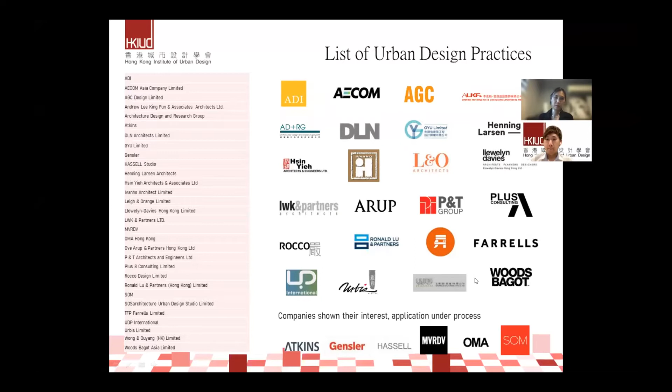For tonight's webinar, we are very pleased to share our very first physical activity, conducted on June 12th, Saturday, with great support from the Harbourfront Office, including our founding member Mr. Vincent, JP, Chairman of the Harbourfront Commission, and also the Principal Assistant Secretary of the Harbourfront Office, Rosaline Zhang. They joined our tour and guided us, showing the great effort in transforming the Hong Kong waterfront in recent years.

This slide shows the activity we had, the two-hour journey that they brought us through. Now we will show a quick video highlighting the tour, guided and hosted by the Harbourfront Office.

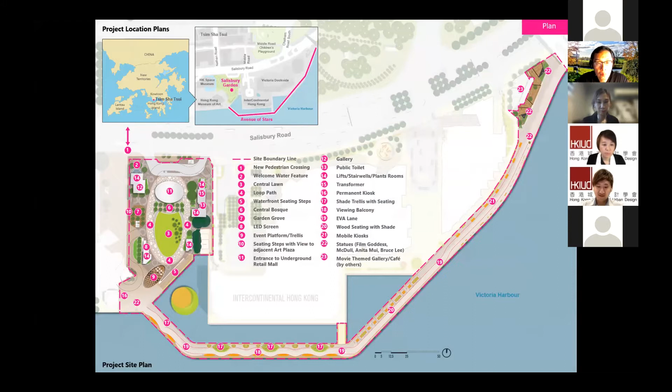Public consultation was undertaken early on with the local district council and with a long list of stakeholders, primarily the Hong Kong film industry. Then in 2015, a Hong Kong-wide open public consultation was held with both local residents and tourists participating.

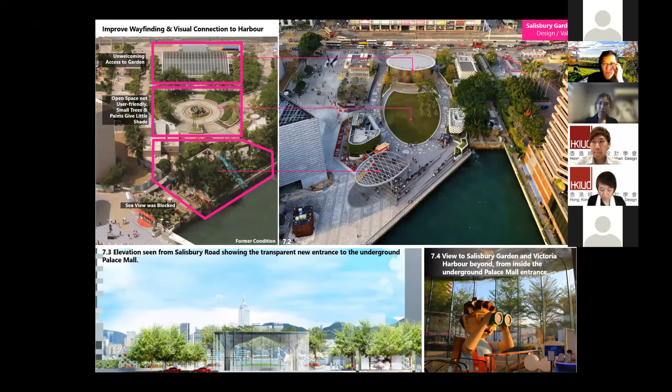I'll talk first about Salisbury Garden. There were numerous technical constraints in our design, principally the fact that the garden is located above an existing underground shopping mall, which meant firstly that structural loadings were largely predetermined, and secondly that we had to accommodate a number of pop-up houses serving various purposes related to the mall, such as E&M rooms, lifts, and fire exits.

Main problems with the existing condition of the garden, as shown in the image on the left, were the total lack of visual connection with the harbour and a very inward-looking design layout that ignored the great waterfront location and contained palms and small trees that offered very little shade to the users.

So what we did was basically remove all the visual blockage and improve the overall legibility of the design layout, as shown on the image on the right. We pushed all the pop-up buildings to the east and west edges of the garden and opened up the centre to provide a multi-purpose lawn offering great views to the harbour.

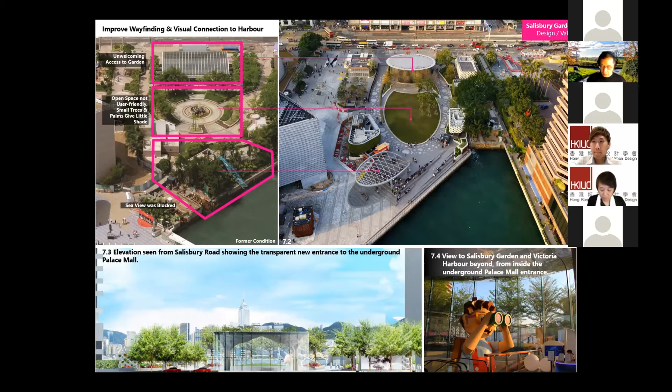The loop path on either side of the lawn provides a direct route to the harbour from Salisbury Road and draws people forward to the Harbourfront. The central event lawn on either side is the key centerpiece of the whole design.

It is gently domed and provides a multi-purpose space for lounging, sunbathing, casual play, picnicking, and photo taking. The lawn is a highly flexible space that people have been using for a variety of purposes during day and night. It is actually a new destination location along the Harbourfront, or at least it was, but more about that later.

Another key aspect of the design is the treatment of the houses around the garden perimeter. These are clad with two complementary green wall designs. Firstly, the so-called garden walls, inspired by the orchid flower, comprise elegantly shaped precast GRC modules that provide a setting for lush planting. Secondly, the green fern walls provide a simple yet attractive green texture that visually contrasts with the garden walls.

At the north end of the garden, a welcome water feature is provided to flag up the existence of the garden to passing pedestrians on Salisbury Road.

Planting performs several very important functional and aesthetic roles in Salisbury Garden. The trees play a key role in shaping and defining the different spaces within the garden, framing views towards the harbour and providing the shade so vital to the comfort of users in the hot summer months.

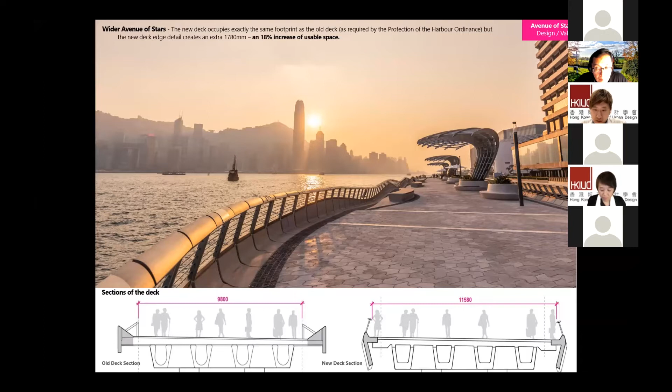One other key thing that we had to do was to comply with the protection of the harbour ordinance. This meant that the new deck could not extend 1 millimetre outside the footprint of the old deck. Yet by clever design of the edge balustrade, we were able to increase the usable space from just under 10 metres to over 11.5 metres, an increase of about 18% in usable space.

The other major change to the deck was the introduction of undulations that create opportunities for step seating and viewing balconies, which helps to optimize views to the harbour across the entire width of the promenade. The balustrade detail also helps create better visibility of the water when compared with the old design, enabling people to feel closer to the water.

The sculptural edges of the parapet comprise overlapping fish scale pieces that conceal LED lights that provide a dramatic ribbon of light when viewed from passing cruise boats and even from the other side of the harbour.

Another significant feature was the relocation of the handprints of the film stars from the ground, as in the old design, to the balustrade railing. This is a far more hygienic arrangement and also means that people checking out the handprints are located to the side of the main central pedestrian thoroughfare.

To enhance the user experience, QR codes and the handprint plaques link to websites with information on the stars. Also, the 4 existing statues of Anita Mui, Bruce Lee, McDull, and the Goddess of Film are also given beautiful new settings that provide enhanced photo opportunities.

Seating provision is dramatically increased by a factor of almost 4, and in a variety of different shapes and sizes, which is important because it gives the public choice depending on their individual preferences and whether they're in a large group, just a couple, or a singleton.

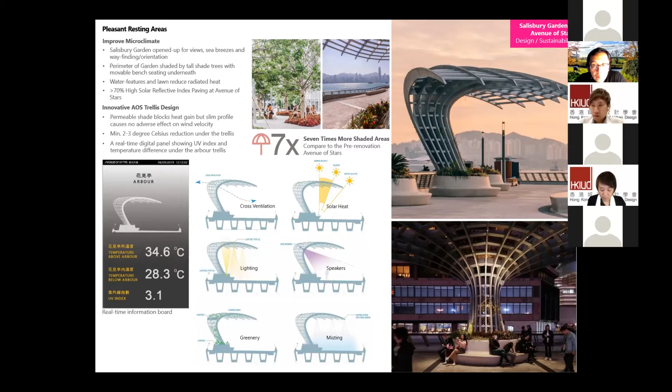And the 4 large trellises are really an elegant and quite a smart design, intended to maximize shade whilst minimizing visual obstruction of the harbour to the neighbouring Intercontinental Hotel. They also contain downlighting, speakers, and misting devices to assist in the cooling effect.

Although the loading restrictions prevented the planting of trees in the Avenue of Stars, the trellises actually perform a similar shading function, but in a more streamlined manner. The shrubs, ground covers, and climber planting was chosen carefully to be able to tolerate the harsh seafront environment, and it is thriving.

A large number of sustainable design elements were incorporated into the design of both Salisbury Garden and the Avenue of Stars from the outset, and Avenue of Stars is the first project in China to be awarded the SITES gold certification.

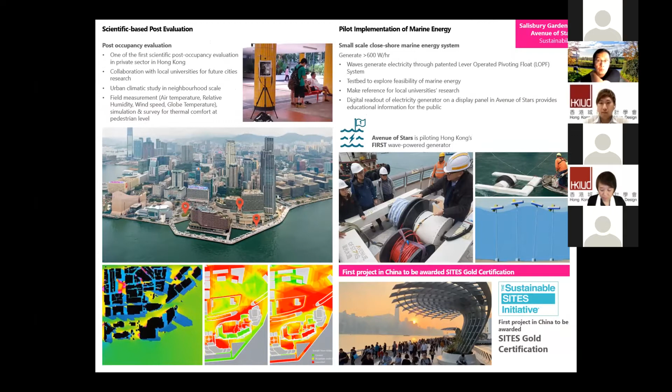So I'd now like to update you a little bit on some recent changes and additions, and maybe later we can discuss whether we think these are good or not so good.

They erected those to stop people sitting in large groups on the balcony seats. Anyway, whatever the reason, I think the planting looks good, adds to the overall greening effect, and does not block views or access to the balustrade. So overall, I think that's okay.

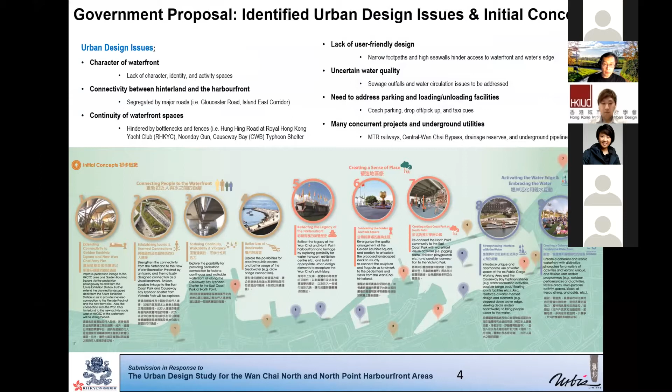So if we go to the government initiatives, there's absolutely nothing wrong with the broad identification of issues that we went through. Certainly there is a lack of character in the waterfront, and you'll see this from my later slides. I don't have any problems with some of the things suggested within the framework suggested by the government, but at the same time, we built upon these just to go that little bit further and really to get into some of the forgotten areas.

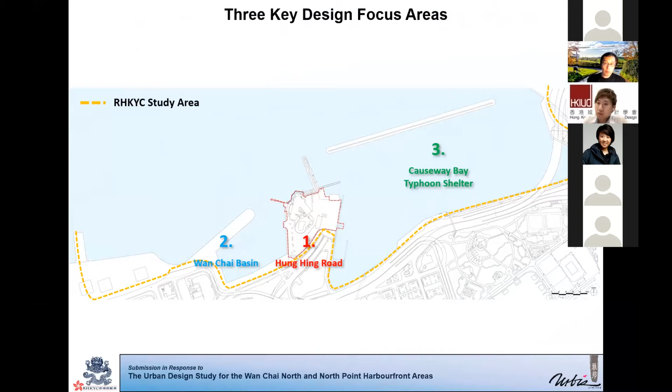So we divided the area into basically three key design focus areas. You can see that on this screen.

So starting with the Hung Hing Road. Now, you might not think this is particularly important, but in fact it is. It's not only the access to the Hong Kong Yacht Club, but it's also the access to the new police officers club, and of course the waterfront itself.

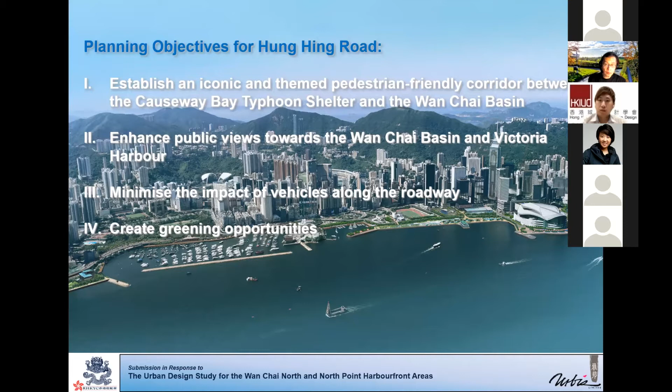So we looked at various things. There's four major elements here. Obviously, greening, minimize the impact of vehicles, which is important and not unachievable. As Sandy's just been mentioning, optimizing views, very important. And then trying to optimize accessibility by pedestrians.

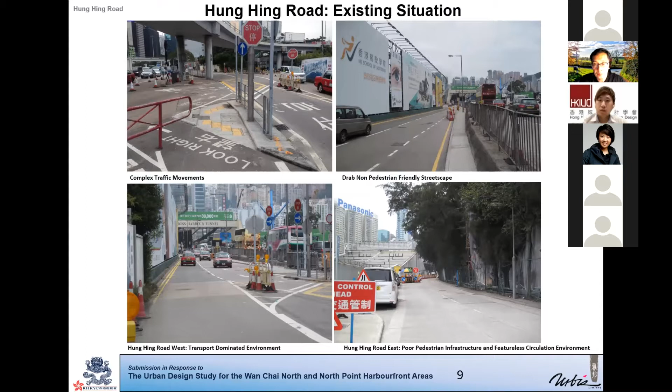Now, if you look at it now, at the present time - okay, so these are slightly old photographs, but a lot of this is what it's like today. It's a real mess, and it has no character whatsoever. And yet this is actually a fundamental part of Hong Kong adjacent to the waterfront.

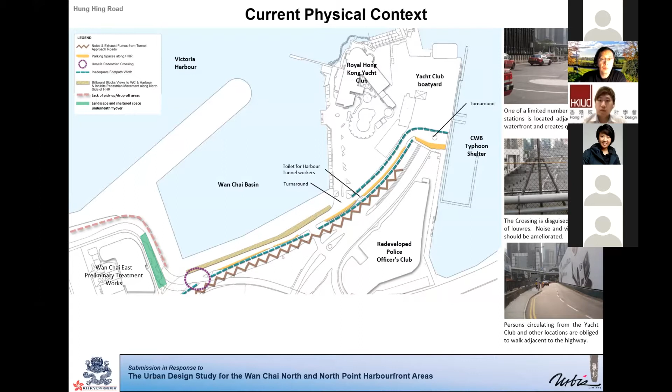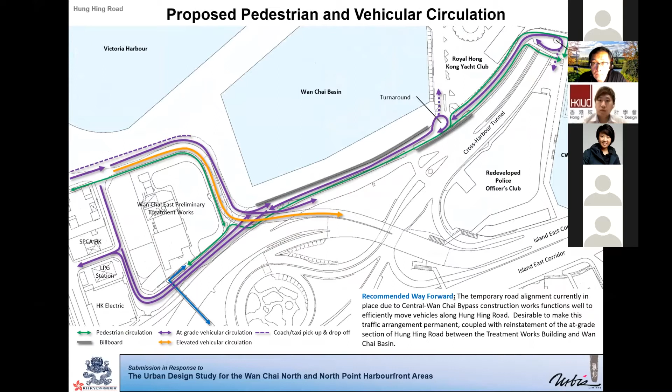So pedestrian vehicle circulation is shown in this drawing. I think that's fairly explanatory. And what we've done is proposed amendments to this. We think that the temporary road arrangement was actually quite good because it actually circulated vehicles in a very sensible way, so we thought that that could go ahead.

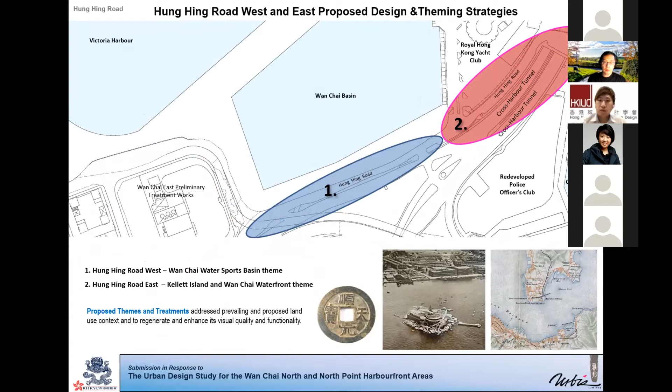So one of the main things here is an optimal intervention we suggested was to take away the advertising billboards here and to completely revitalize the area.

To assist in promoting a better waterfront for people, we suggested the construction of a noise barrier. Now, I'm not a great fan of noise barriers, but in situations like this, a subtly introduced noise barrier, very much like you've got at Quarry Bay, can be very effective and not very visually intrusive. And certainly it wouldn't have birds flying across it in sort of stencil-like graphics.

Removal of the billboard is important. What you get there by the removal of that is a connection for the people walking along Hung Hing Road, but also visual connections for people in the traffic jam going into the Cross Harbour Tunnel. And beyond that, people living in Causeway Bay.

We propose reprovisioning the footpath into the waterfront overall, where the billboards were, and then the introduction of quality paving and planting areas.

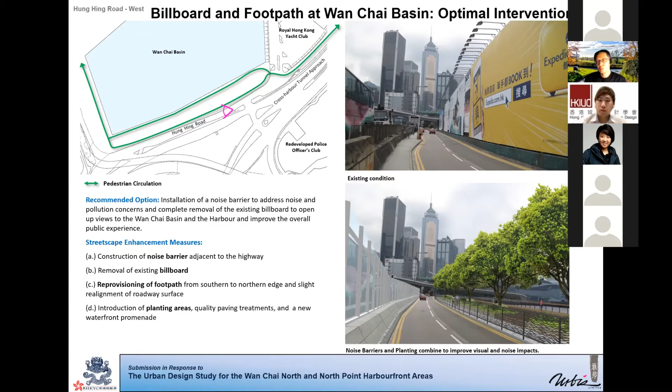As for the yacht club itself, clearly members and taxis and so on had to get into the yacht club, but it was important to allow people circulating along Hung Hing Road from the waterfront to be able to get along the waterfront and circulate right down to the typhoon shelter in Causeway Bay, as well as the police officers club. So you had a couple of things here.

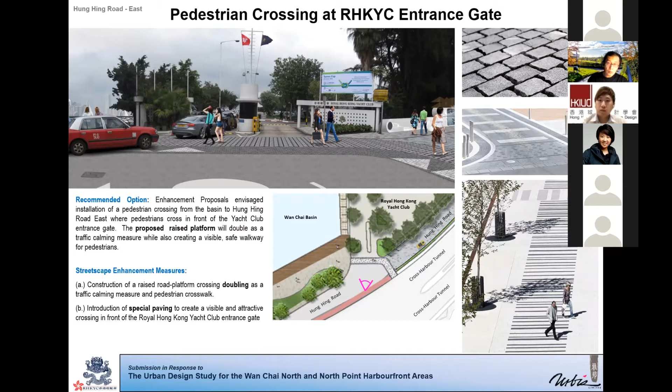You had a road platform crossing that you can see some of the featured designs on the right-hand side of this slide and the sort of thematic approaches that you may wish to incorporate. So it was a special paving that would be both attractive, and it would also have the function of slowing down traffic.

And then for the eastern side of Hung Hing Road, it was in very poor condition. You've got parking for no real reason at all, just that it's there. So we proposed as an initial step to remove the parking areas, to re-provision the footpath to the northern edge of the site, to create a dedicated path here, and to repave the vehicle circulation area in an interesting way so that it was distinctive and had a good quality.

And then ultimately, and this would be really in the hands of the yacht club, to remove the chain link fence adjacent to their property and introduce interpretive panels. And I'll come back to those in a moment.

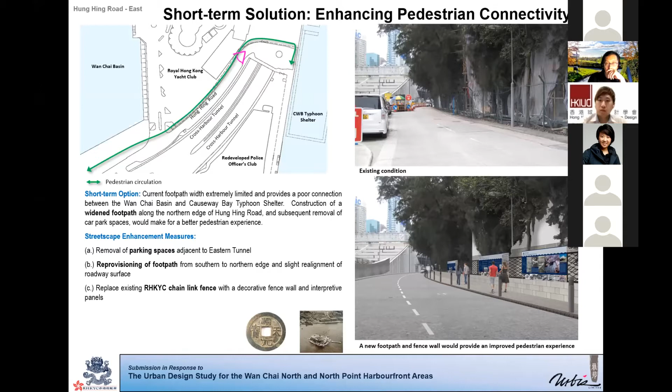So essentially, in an interim option, we could have a widened footpath along the northern edge of Hung Hing Road, remove the parking spaces, re-provision the footpath, and then have a shared roadway surface just east of the yacht club, extending down towards the police officers club as a shared surface for traffic. There's not a lot of traffic here, just some servicing the yacht club, so there's no reason a shared surface couldn't work. There's just reticence in government to promote shared surfaces generally, so that's something one would have to overcome.

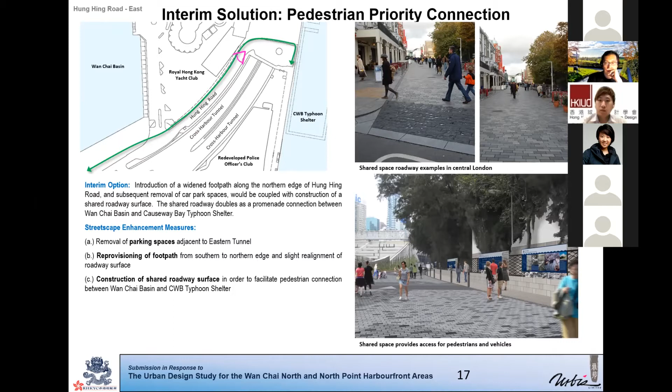But Hong Kong does have a walkability ambition, so this will be part and parcel of achieving that. And now looking at this, we've called this the Kellett Island Causeway.

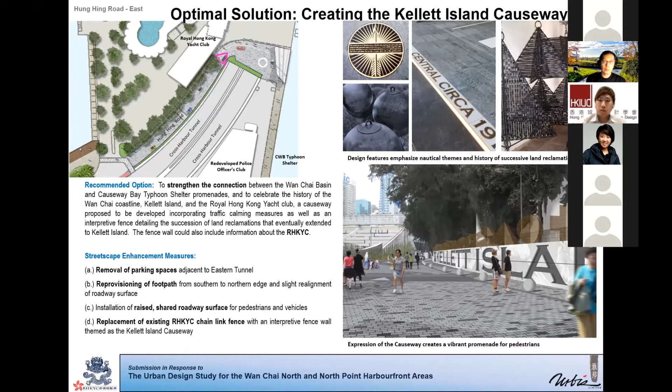So you could go even further. We'd have the causeway, as we've called it, which extends right to the promenade edge adjacent to the Causeway Bay Typhoon Shelter, with elements reflecting the harbour. You can introduce nautical themes and lots of other elements within the area that can help create a quality space, a space that people can actually walk along.

And then at the termination of the Kellett Island Causeway, you would have a situation where people would be able to safely look out over the typhoon shelter and enjoy the views along that edge. So that's really, really important. There's a lot of things there that can help contribute and create a sense of place and a vibrant waterfront.

Now, the elements we are thinking of are bespoke directional signage and also information signage. You can have the history of the yacht club, the history of the spaces within the area, the evolution of the yacht club from its site, which used to be in North Point, the building still exists, to its present island site.

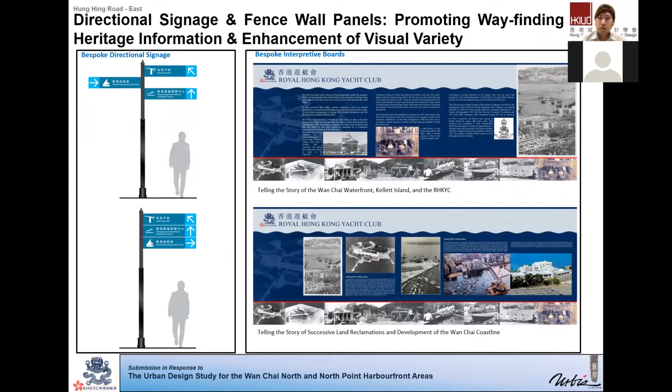And it's gone through several historic developments. During the Second World War, the Japanese occupied it for various purposes. But nevertheless, you could have real information provision here that would tell the story of the area, and it in itself create a destination.

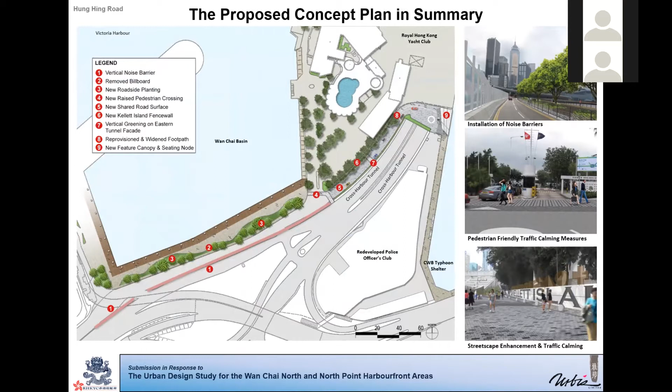So in summary, these are the major elements: getting the noise barriers installed, realigning Hung Hing Road, expanding the waterfront, safe crossings at the yacht club, and then street enhancement, shared space, and traffic calming.

Moving on to the Wan Chai Basin, what we're looking at here, and this was clearly in the interests of the yacht club, is to establish a world-class water sports and recreation precinct. We don't take best advantage of our waterfronts for water sports activities - they're very limited. We get the occasional event, but why can't we simply create a feature and facility that can do that all year round?

And that would enhance the vibrancy of the waterfront, because there'll always be something happening there. It's not just planted spaces, it's not just design clutter shoved at the waterfront in an attempt to create interest. It's a destination, which is very, very important.

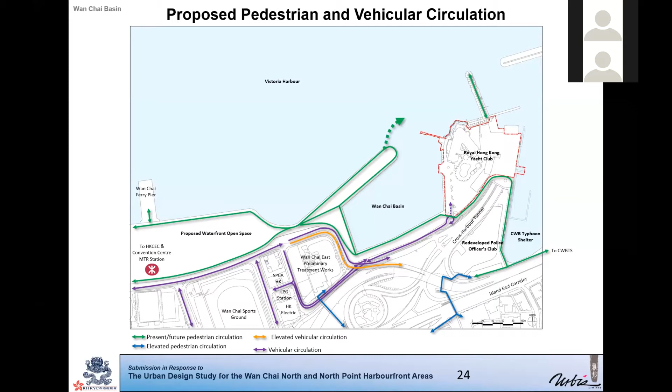So we have the various destination spaces and circulation spaces. We're envisaging, you can see in the green line, circulation right to the arm of the former Wan Chai Basin mooring areas, and that would then circulate right round past the redeveloped police officers club, right down into the Causeway Bay Typhoon Shelter.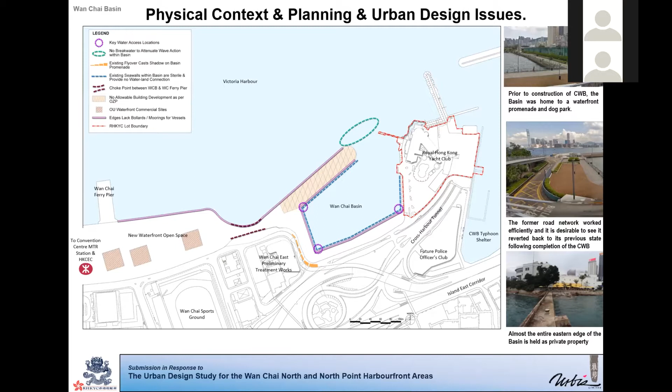So, also looking at various issues - if you look at the bottom left-hand side, the former proposals in the outline development plan, sought by the planning department, were to create a waterfront space, yet with disparate commercial retail elements which didn't seem to have much sense and seemed to be carried over. So there were a few things here we thought would be important to adjust.

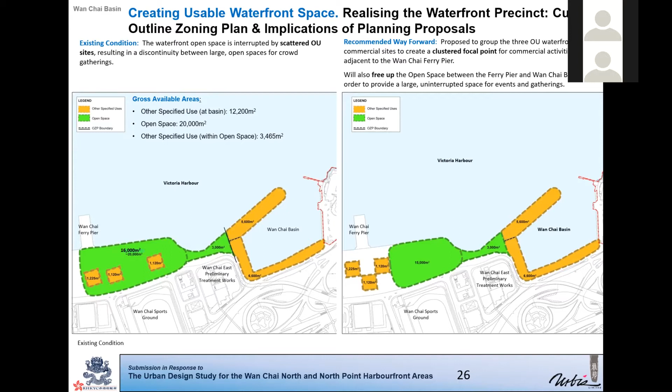So you've got these large areas here. On the western side, you have a cluster of potential commercial areas and a series of disparate parts, all zoned for different purposes, but generally under an OU banner. So what we proposed was the clustering of the retail and commercial element behind the Wan Chai ferry pier, where it could enjoy footfall and perhaps provide some activation, while also providing consolidated spaces where water-related activities, exhibitions, and so on could actually take place.

There was an ambition in the brief issued by government to get access around the Royal Hong Kong Yacht Club. In short, this is technically infeasible, notwithstanding the implications of the protection of the harbour ordinance. And really, why would you want to do it? If you improved Hung Hing Road to the standard we just discussed, it would be fine, there'd be no need to walk around here. Apart from that, you would affect some remaining parts of natural waterfront that still exist around the former Kellett Island.

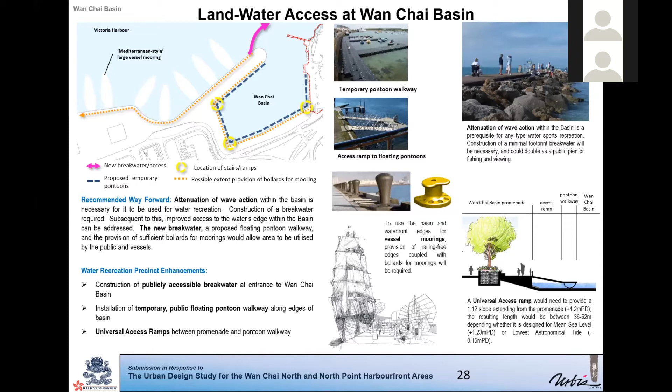So what we've looked at is land-water access in different ways, such as an access ramp to floating pontoons, a temporary floating pontoon so you could get access into the area, and vessel moorings for large sailing vessels and a whole series of other things. We also looked at universal access, which was vitally important, but the emphasis was on providing a publicly accessible breakwater at the entrance to the Wan Chai Basin.

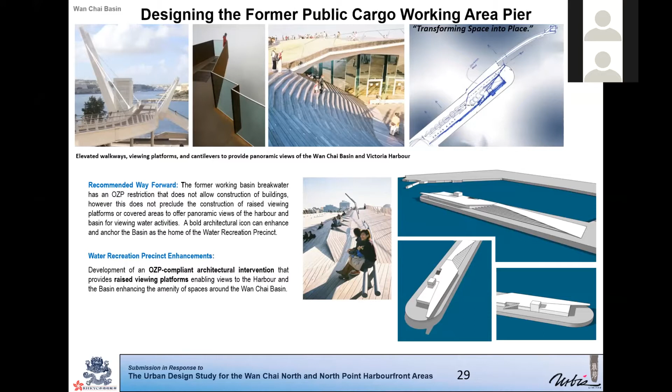And then, not forgetting that people want to look across the harbour, what you want are viewing points and really interesting destination spaces that you can go into, well designed and architecturally well conceived. That would be in line with the OZP - the elements we proposed were OZP compliant, no doubt about it. Other elements we looked at, of course, is when you have a water basin that's actually going to hold events, you need something to support it.

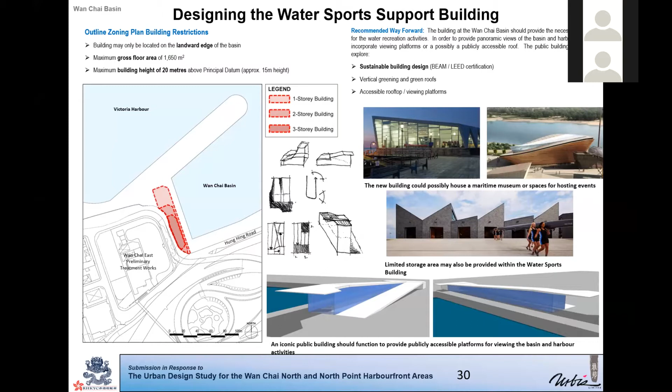That being a water sports support building. So we designed a building that could readily be accommodated within the provisions of the outline zoning plan without intruding upon its provisions, and this could sit very nicely without intruding upon the waterfront in any way. Pedestrian circulation adjacent to the basin would not be interfered with, and you'd maintain areas for exhibitions and so on to the northeast and to the west of the facility.

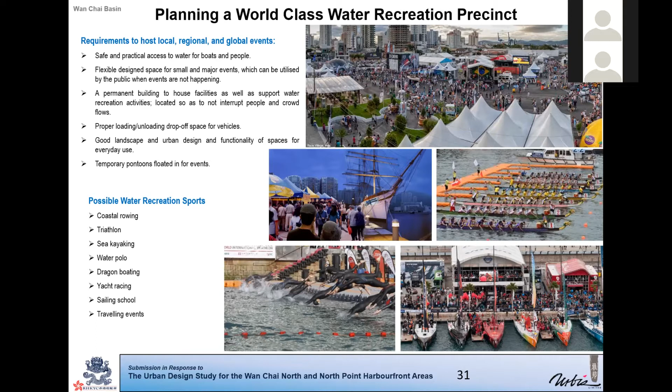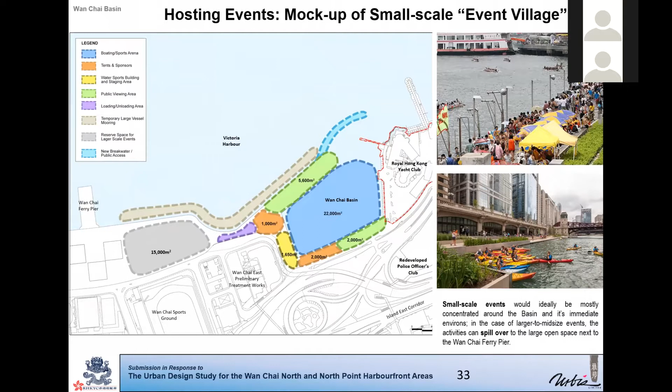Now, to move on to the water sports - we came up with a land use budget for these various facilities. There's a lot that could take place within its environs and could spill over into areas adjacent to the Wan Chai ferry pier, assuming the retail elements were sensibly relocated and compressed. And then you could have flexible use of space, and multiple events, which is very, very important - you just don't do the same thing all year round. It's an ongoing thing that has to be planned for, it has to be evented, and it has to be continuous.

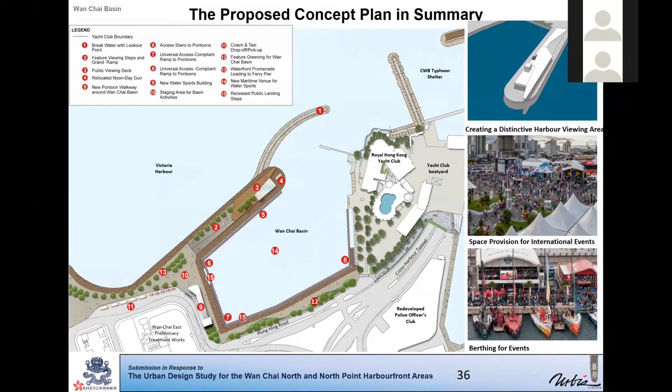So the overall master plan, that's it in a nutshell. I won't go into this in any detail, but it just shows you the vision for the proposed concept plan for the basin. And finally, moving on to the Causeway Bay Typhoon Shelter - it's a continuous promenade that goes through the area.

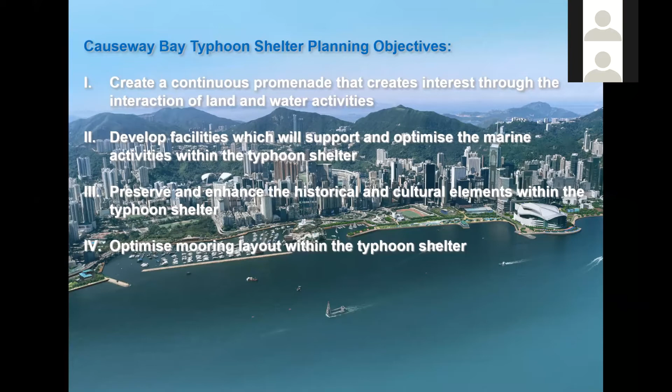Now, you'll be well aware that the promenade at the Typhoon Shelter, particularly adjacent to Gloucester Road, is heavily, heavily constrained. There's very little option for pedestrian circulation - you've got to be pretty irrepressible to get to the noonday gun. So we're looking at what you could do to optimize circulation, but also to optimize the mooring layout within the typhoon shelter, because Hong Kong has a chronic shortage of moorings. By optimizing the mooring layout, you could actually increase the number of mooring spaces available.

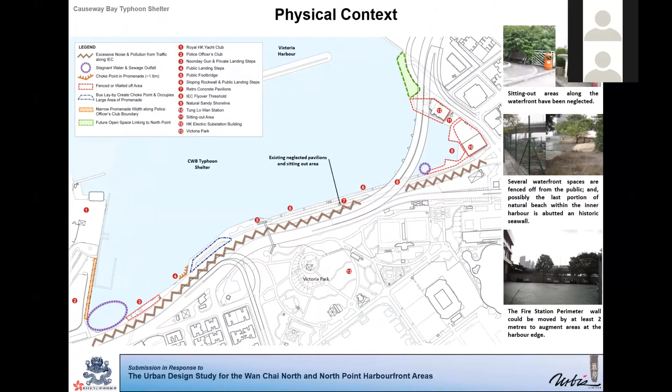So we looked at the current circulation issues, then went on to look at the physical context and the various constraints. A lot of the spaces are dead - walls of the fire station and other facilities adjacent to it are unnecessarily pushed towards the waterfront, constraining public access, which is rather worrying. There are neglected areas in the overall area. So again, we're looking at the construction of a noise barrier adjacent to Island East Corridor, very similar to the one we had along Hung Hing Road, and then the upgrading of existing spaces to improve continuity and the overall quality of the promenade.

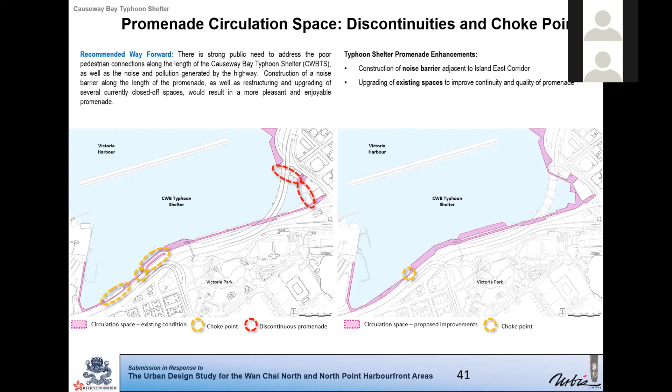One of the major features I've just mentioned is the noonday gun. It's been there for many years and has actually historically been in many different locations, so it could well be moved. We're suggesting it goes to the end of the Wan Chai Basin cargo working area, to the protrusion that sticks out into the harbour. It's not historically definite that it has to be in this location—it's a recent location, so it could easily be moved. So there's a lot of things that could be done.

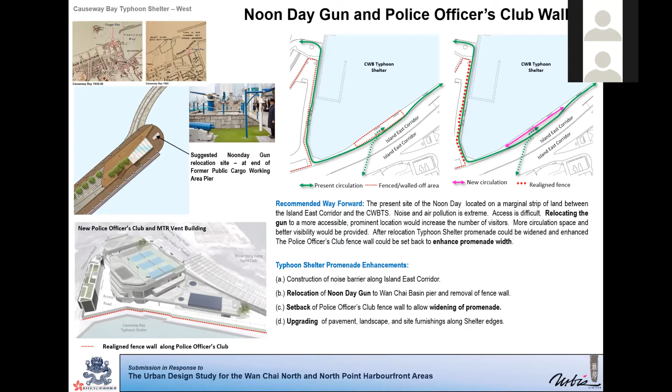Setback of the police officers' club fence could help increase the area of waterfront and promenade adjacent to the western side of the Causeway Bay Typhoon Shelter. Generally speaking, we could upgrade the pavement, landscape and site furnishings along the Typhoon Shelter edges—these are in an appalling condition right now.

Hi Ellen, sorry to interrupt—I'm afraid time is up. I'm just about finished, nearly there, sorry. Please save some time. No, I'll whiz through this, I'm nearly finished.

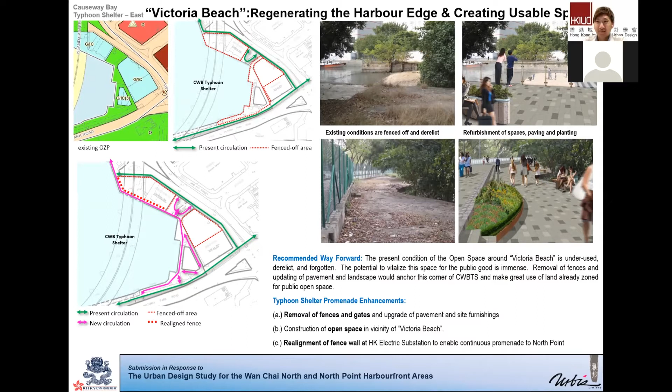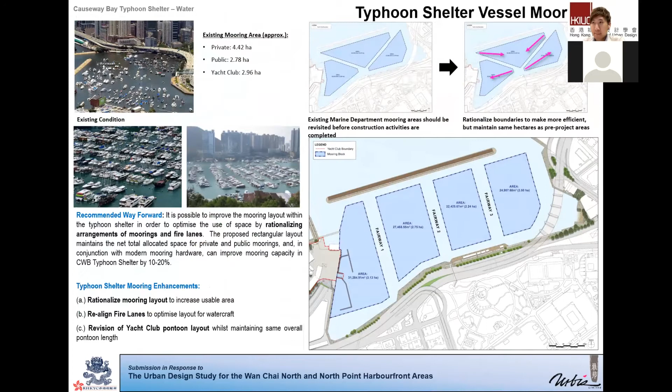So we've got some existing conditions that are extremely poor, and we aim to improve these. You can see the various suggestions, then the optimization of the waterfront—I won't go into detail as we're running out of time—then various facilities you could introduce to enhance mooring, including fueling facilities.

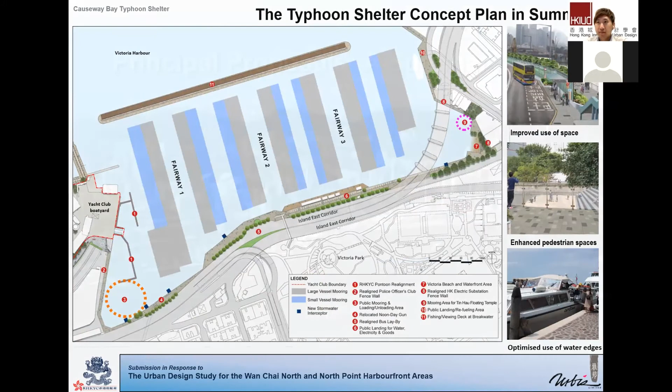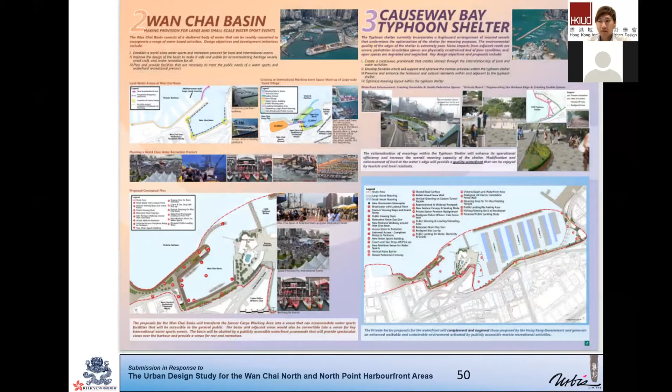So that's all good, as I was saying, Sunnie, I am at the end. These are the summaries of the waterfront: Hung Hing Road improvements, very important, a whole range of facilities could be improved, and then Wan Chai Basin improvements there as well as the Causeway Bay Typhoon Shelter. So in overall terms, the master plan.

Thank you very much, and I'm sorry I overindulged in my time. Thank you. Thank you, Ellen.

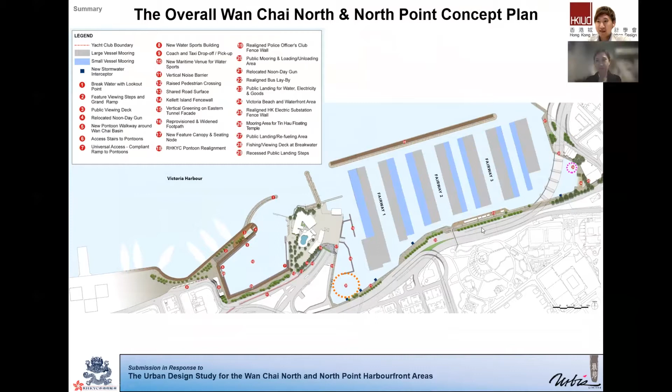Thank you for the very great concept plans and strategies to share with us tonight, in realization of both Sandy and Ellen from their firm, the realization of Tsim Sha Tsui and Wan Chai Harbourfront. This is great effort trying out different approaches to revitalize these forgotten areas with smart design strategy, also people-centric design strategy, to open up accessibility to our precious assets, which is the beautiful waterfront.

So next, I'm very delighted to invite Dr. Edmund Lee, former Executive Director of Hong Kong Design Center, and Ms. Sam Lam, Director of Business Development and Project of Hong Kong Design Center, to share their recent placemaking project, working with local creatives in bringing a transformative month via their Design District Hong Kong project. The Design District project has actively engaged designers and stakeholders to join efforts at various scales to create different placemaking projects. I'm very excited to learn about the process of this project which just happened in June, right Sam? May I hand over now to you, Sam, please.

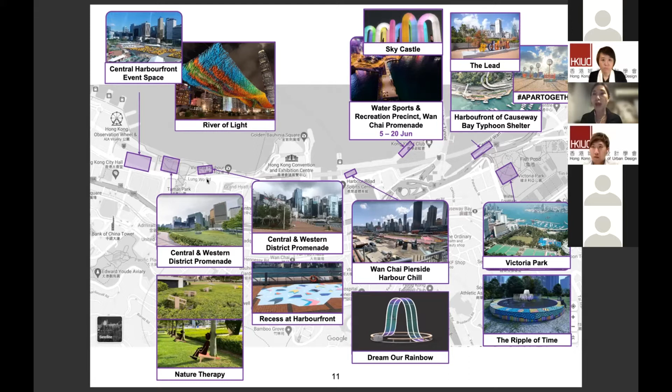This is the layout of how we imagine the Harbourfront as an exhibition venue. The Harbourfront currently opens section by section due to different phases, but we don't want to see each of the spaces as individual spaces. We think the planning and reimagination should be as a whole, as a curated concept. This is how we want to help citizens understand what the Harbourfront is, and how we can imagine it together.

This work was done in collaboration with the Tai Hang Fire Dragon Association and our designer, and it tells the value of place because it's tied into the history of this typhoon shelter. After the fire dragon dance ends, they have a ritual to burn the fire dragon head and throw it into the typhoon shelter. This history gives us a site-specific start to our exhibition.

Secondly is our commission work, which is at the end of our exhibition. It's like a floating river inspired by Victoria Harbour, placed at the central point, so you can see how we play with the fire dragon concept throughout our exhibition.

The third social attribute is diversity of place. Diversity of place provides continuous activity or a variety of products or services, and a mixture of people that allows them to interact with each other, to tumble onto the fun and mingle with other people. So it provides that opportunity.

We have one installation at Victoria Park that illustrates this. It ties into the history of Wan Chai, especially the reclamation of the land, and we also have an app to show the story of Wan Chai.

For the other one, at the water recreation spot that Alan mentioned, we think that through our design installation, we want to bring diversity of place. Cherry, can you help me play the Sky Castle video?

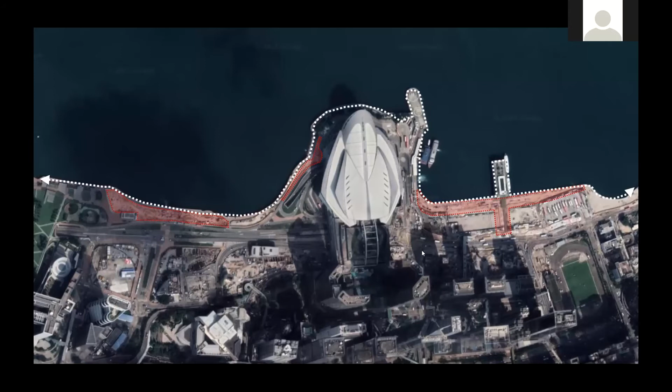The two projects are located at the east and west side of the convention center. They form part of the Victoria Harbour Promenade, which has a total length of 5.5 kilometers and is by far the longest promenade in Hong Kong. The project to the west serves as a connector bridging the landmarks within the district, Tamar and the convention center, while the project to the east acts as a mediator between the dense urban fabric and the harbour. The two projects were approached differently, aiming to achieve the same goal.

We'll start by introducing the design of the connector, which was open to the public in May. In this project, we do not design to just link up the walking trails. We aim to maximize the leisure space for the public to enjoy and to appreciate the impeccable view of the harbour.

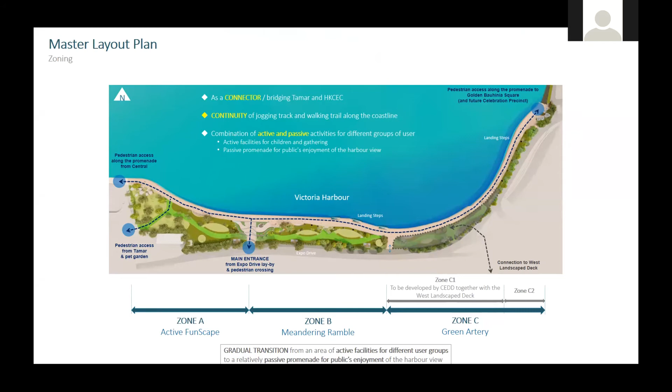We'll start with the master layout plan. The paving along the waterfront was first opened in October 2019, connecting the harbourfront area of Central and Wan Chai for early enjoyment of the public. We then worked on the design for the green area shown in the slide. The promenade area is subdivided into 3 different zones: Zone A, B, and C.

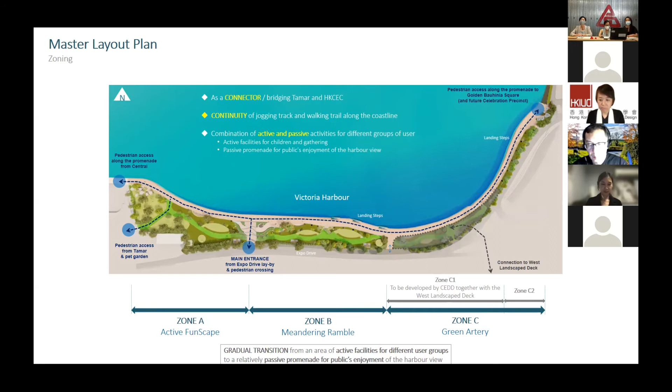Given the size and depth of Zone A, it was designed as an active funscape, a children-friendly green space. As the depth of the site decreases along west to east, the nature of the promenade gradually transits from active facilities for children and gathering to a relatively more passive area for leisure and meandering. In between our sites is a landscaped deck under construction by CEDD, which will further improve the connectivity between Wan Chai and the harbourfront. So we'll first start with the active funscape, Zone A.

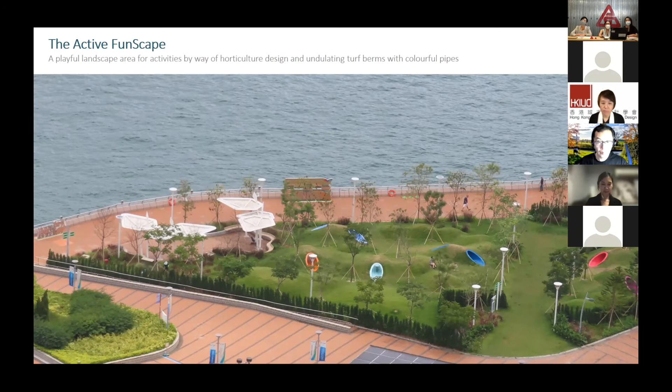For this area, differing from the common children's playgrounds with mainly just fixtures, the funscape approach cultivates a free space for activities by way of the horticulture design and undulating green berms with colorful pipes. With this undulating landform, the berm design itself transforms a green free space into a platform for children to just run around and explore.

The eye-catching tunnels by means of painted drainage pipes added excitement and palette to this green canvas. In this photo, the Harbour Office of the Development Bureau collaborated with the Playright Children's Play Association to offer children an inclusive play experience at this open lawn setting. This collaboration aims at encouraging children to use their imagination to create their own play space and enjoy a creative play journey at the Harbourfront area.

The space is equally enjoyable at night. The form topology has gently raised the landscape area, and while seating and resting at the top of the berm, a different perspective towards the Victoria Harbour can be appreciated, unobstructed by the balustrade along the coastline, which were previously constructed by CEDD during the land reclamation project.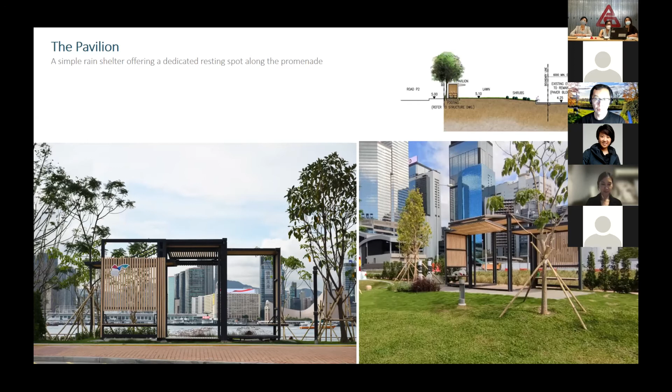Secondly, shading is also an important element in the promenade projects. We have maximized tree planting within the site. Approximately 270 trees were planted to optimize the natural shading within the site. At strategic locations, modular rain shelters are also offered as a dedicated resting spot along the promenade. Same as the berms at the frontscape, the pavilions were slightly raised for the enjoyment of an unobstructed sea view. Last but not least, a specially articulated sunscreen was designed for sun shading at pockets of seating benches. The canopy itself is a featured artwork along the coastline of the harbour.

So I'll now pass the time to Selah to share with us the Pierside Precinct project. Thank you, Denise. Pierside Precinct is connecting Golden Bauhinia Square to Wan Chai Ferry Pier. The west portion was opened in March 2021, and then the portion further east will be opened by end of this year. Let me share with you a video.

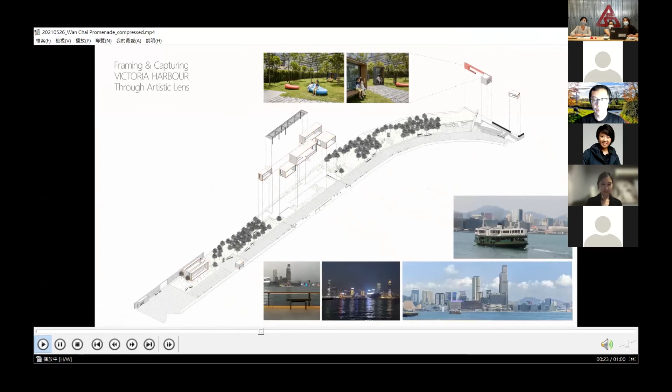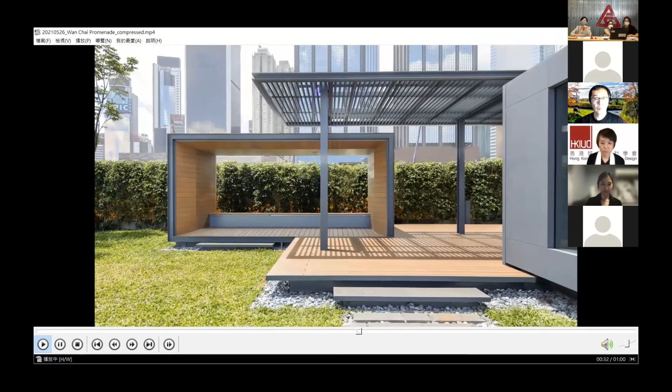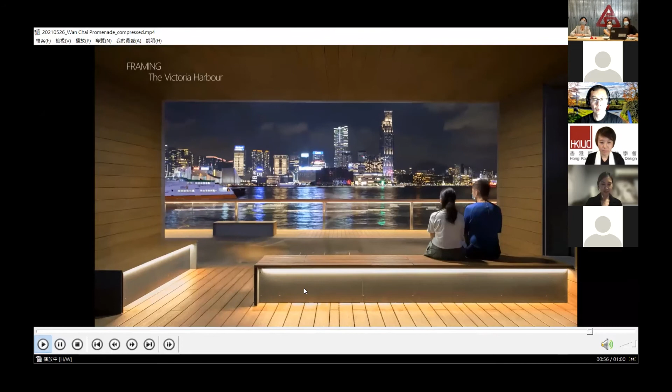Voice is not working, but we can do some voiceover if you like. Can you see the screen?

Yes, okay, thank you. So the promenade design aims to enhance the connectivity in the west-east direction, as well as the north-south direction that connects the Wan Chai hinterland to the Wan Chai Ferry Pier.

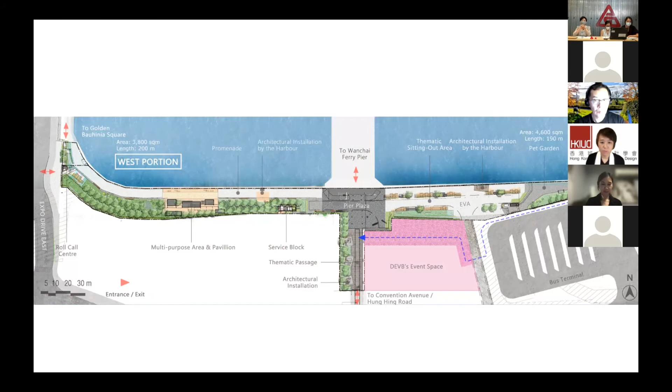In contrast to active open space as presented by Denise earlier, the Wan Chai promenade in the Pierside precinct focuses on serene open spaces with a focus on greenery, openness, and transparency towards the harbor, Victoria Harbour. Victoria Harbour is the heart of the promenade design.

We focus on 3 layers, with greenery at the back, connecting passages in the middle, and the harbour in the front.

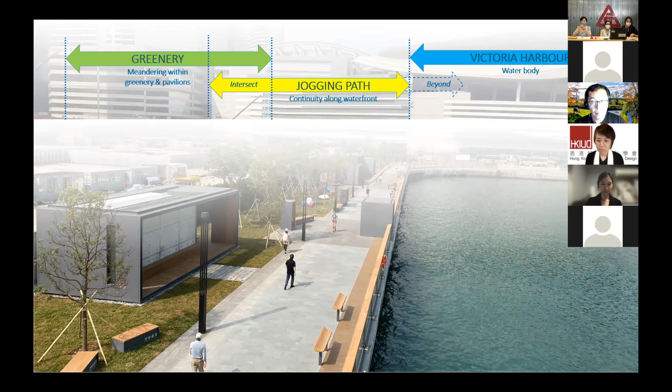To mediate the greenery and the passage, a meandering path was introduced to connect the greenery and the connecting passage. The public can walk through the landscape area and sit under tree shading, enjoying the play of light and shadow.

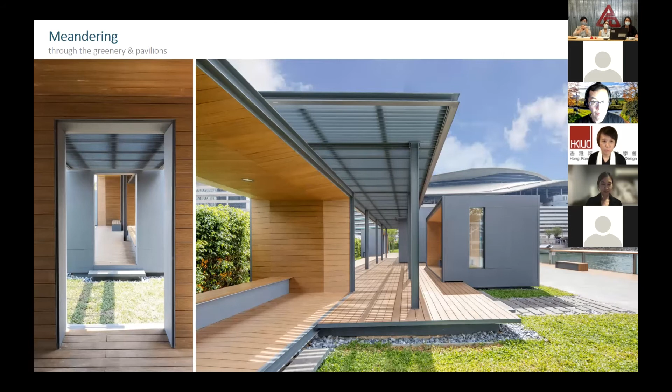The public can sit under the pavilion, enjoying the breeze from Victoria Harbour, and enjoy the sea view towards Victoria Harbour with their families and friends.

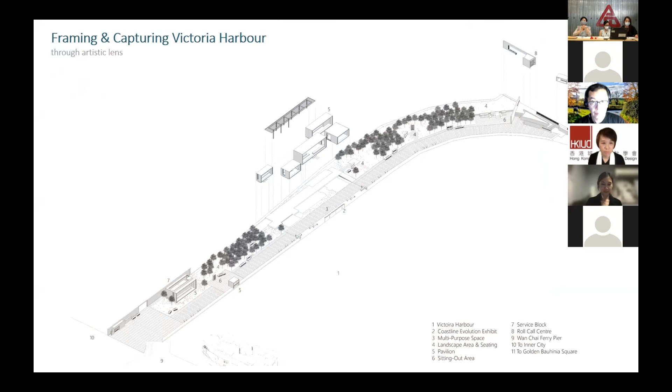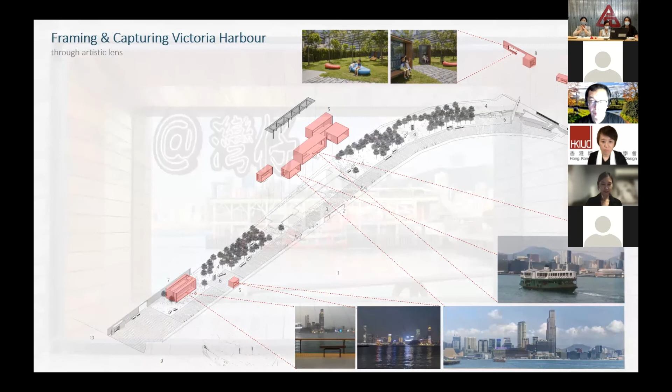Victoria Harbour is the heart of the design. We deliberately frame and capture the harbour view through framing and directional walls. With the framed view, the Wan Chai Ferry Pier and harbour can be interpreted differently.

We have designed a pavilion abutting the seawall with a transparent balustrade. There you can sit next to the edge of the promenade with the closest distance to Victoria Harbour, and enjoy the sea view from daytime until nighttime.

With the use of natural materials like timber and metal, we want to create a serene open space with a focus on the view of Victoria Harbour.

With the introduction of Hong Kong and authentic design elements, the sitting benches and also the pavilion become sittable art, where Wan Chai residents can share their own stories by evoking collective memory.

We also want to create an inclusive promenade design, so the public can bring their own pets on leash. We also introduced different kinds of seating, like sunbathing seats, and some inclusive pavilions, so we can enjoy the public space with different types of target groups.

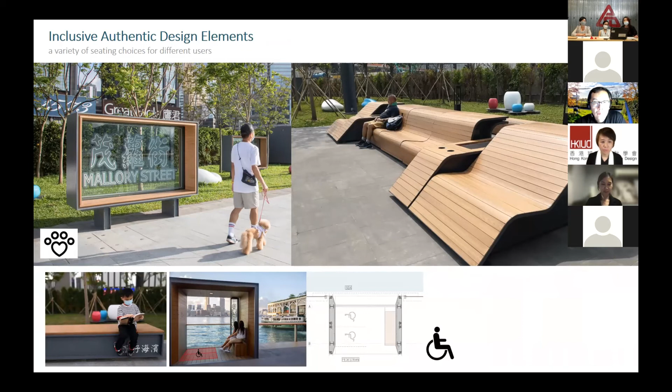Lighting is also very important because we want the promenade to be enjoyed 24 hours a day. So we introduced ambience lighting along the seawall balustrade and along the promenade underneath the pavilion, so the ambience of the promenade can change at nighttime.

We want to create a very vibrant promenade space and hope the public and visitors can enjoy Victoria Harbour in this world-class site. Thank you.

Before the park was completed, the Tamar section, Denise became a young mother and her baby was born. I think this is the best gift she has ever given to her baby, and I'm sure she will enjoy the space herself a lot.